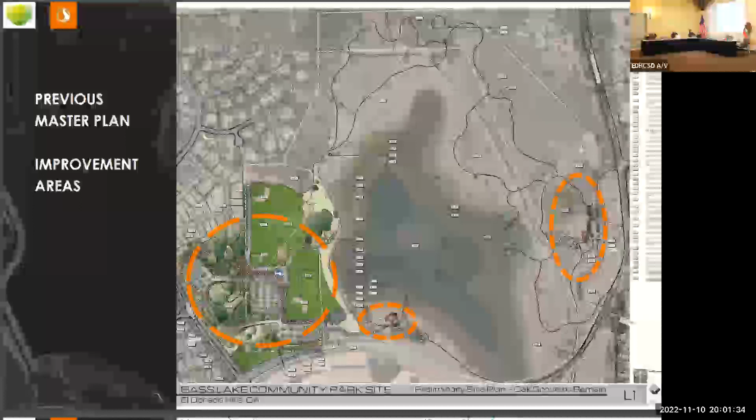Those circles there are the three areas we looked at for some improvements. This is the west side of the park that primarily has all the programming, and this is where we looked at as a team and really looked at ways to improve it.

And the biggest item that we came up with was the parks. In the previous master plan, there was an adventure area here, there was a sensory area over here, and then over by the ball field close to the parking lot, there was another playground. Just talking together as a team, we really wanted to consolidate all those play areas into one, so you can manage them, supervise your children, they're close to the restroom, you're not crossing streets, and it makes a safer environment. So what we did was we took this road here that went straight...

...and we did a parking analysis, and we bent it down and centered it up with the parking lot, which freed up this space here. Then we ended up rotating the field to a north-south orientation that freed up even more space. So this provided approximately over an acre of space where we can program the sensory garden, the adventure area, the all-inclusive play, and the picnic areas buffered from the parking lot. You have an entrance here where everything can be controlled and kept safe.

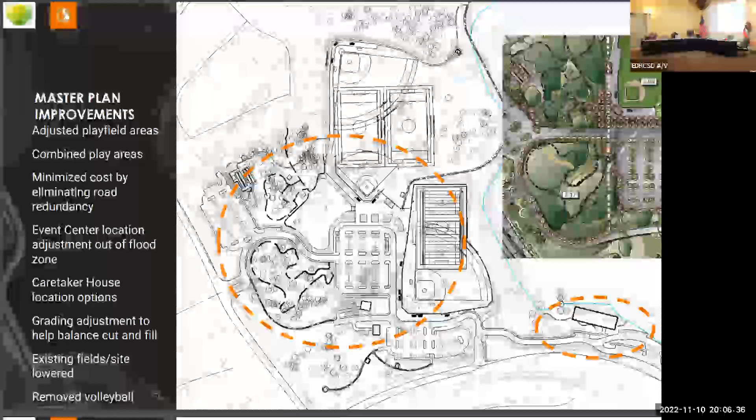On the east side, the original master plan had the nature center building kind of right off the parking lot. We wanted to make it more of an experience, a sense of place, a sense of arrival to the building. So we want to pull it off from the parking lot where you would walk to it, and couple it with the amphitheater. If you have an event or children, you can spill out, have indoor-outdoor connections, and make it more of a multi-purpose space.

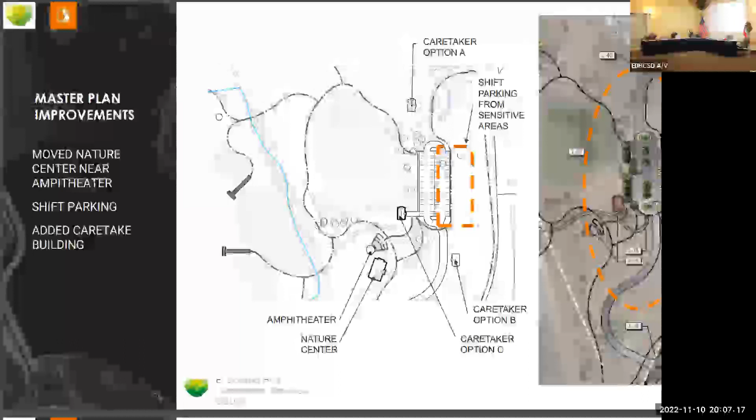We're also talking with staff about a possible caretaker building in the future, possibly a 2-bedroom, 1-bath structure that would help oversee the site. We discussed possible locations for that and did 3 options: one on the north side, one on the south, and one a little more by the pond. None of that's really been decided yet—it's just things we're studying.

We're also pushing back the parking lot a little bit, since there are some sensitive areas off to the side of the seasonal pond.

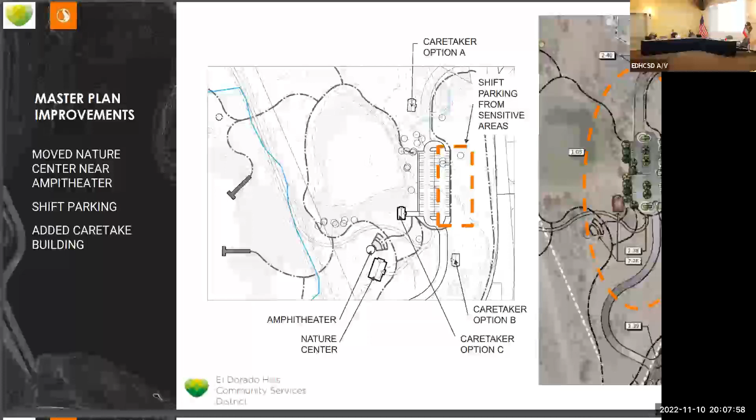Once we got the site plan set, we wanted to look at the grading, since there's a lot of topography out there and we needed to figure out how it would really all work. In the original master plan, the intent was to keep this one field, so we started there—if we kept the field and graded out the site, what would it look like? Essentially, since it's so tight, this area becomes one big super pad, one big flat area at about 1.5%.

So you don't have that much room to play with—you can't really adjust the grade. When we did the analysis to leave this field at existing grade as one big flat area, we were at 130,000 cubic yards of fill. That's a massive amount of fill—it'd be really expensive. So we looked at other alternatives and did some other concepts.

What if we lower this field? If we lower it and cut, that would generate fill we can use elsewhere. Right now we're looking at dropping this field about 5-6 feet to help offset some of the cut and fill. It probably won't balance totally, but it will significantly help.

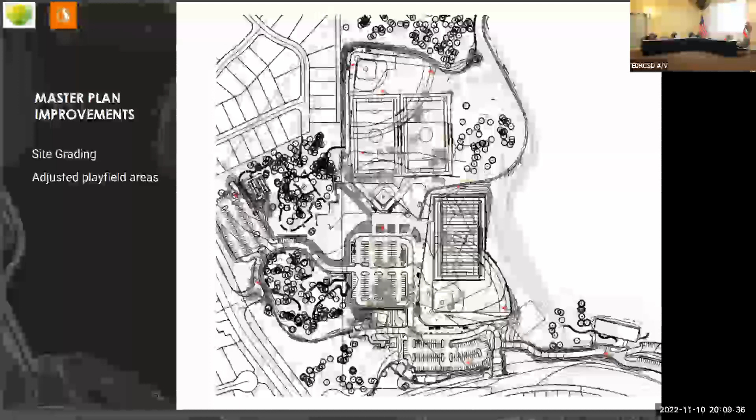Right now Geotech is out there doing test pits on the site to see where the rock is and how deep we can go. If we want to go 6-7 feet and hit rock at 2 feet, we may need to take another look, but we're aiming for the ideal situation to see what we come up with. You can see the slopes are mostly on the edges—we might need little walls, slopes on the edges. We want to minimize retaining walls since they're expensive, but grade it out as much as we can.

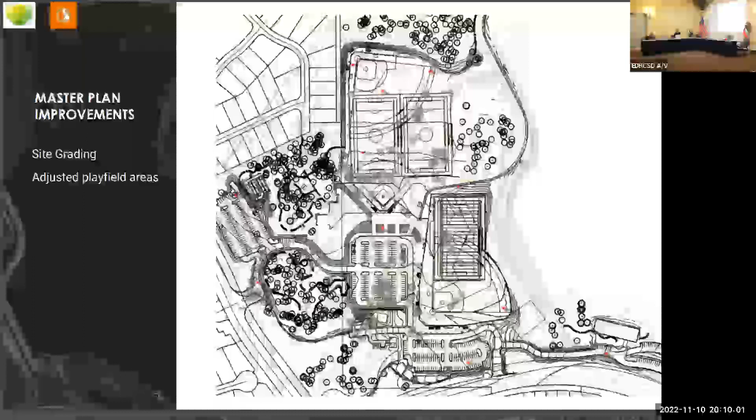Now for the architecture. We worked really closely with staff on the architecture and the programming of the buildings, what's really in them, how big, how they're going to be used, which is really important.

So we started off just looking at the region. We call it the regional craft. What's our inspiration in the region? You've got the oak trees and the great rock outcroppings, obviously the lake and the meadows and the natural environment.

We looked at the materials of the building, what it could be, the colors, finishes, transparency.

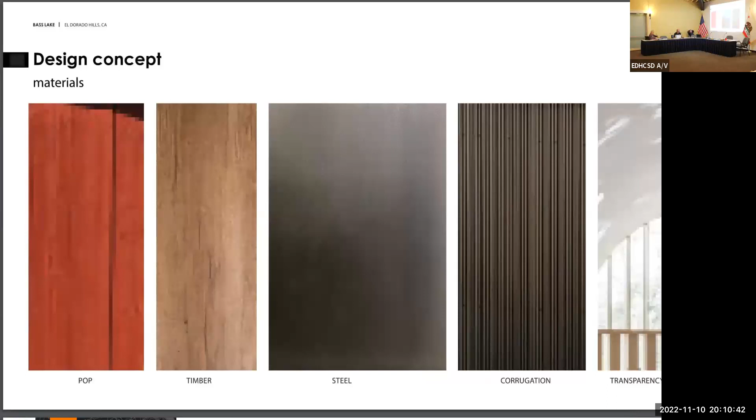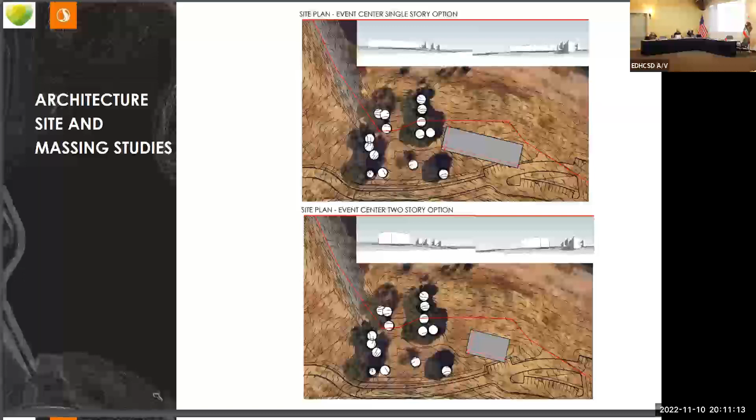Just talking with staff, we're kind of leaning towards the one-story building. It just blends into the scale of the trees, it's not overly dominant, and also it's going to be easier to construct. Your foundations are going to be smaller. You can have nice big trusses like this building here, open ceilings with trusses. You won't have to deal with an elevator, maintenance, or ADA access issues like in a two-story building.

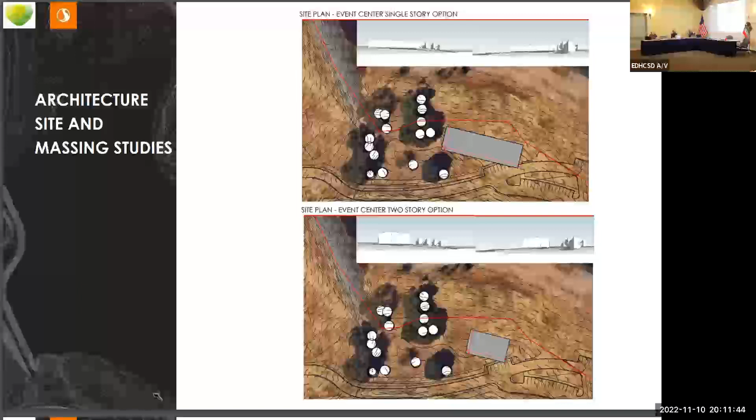Some of the program elements we came up with: for the event center, just in the master plan I think it was more of a placeholder, about 8,500 square feet. We went through analysis with staff and came up with about 13,000 square feet. That's composed of 2 ballrooms, 2 meeting rooms, classrooms, breakout rooms, a warming kitchen, restroom, storage, and a viewing deck. The ballrooms can be partitioned, so they could be one big one or broken up — it's really multi-purpose.

The nature center was originally envisioned at about 2,500 square feet. After we went through it, it's maybe like 5,200 square feet. That would include a reception area, 2 classrooms, a couple labs, a science center, conference room, warming kitchen, storage, restroom, and it'll be connected to the outdoor amphitheater.

And the caretaker house, we're looking at around 1,500 square feet for a 2-bedroom with a living room and bathroom facility.

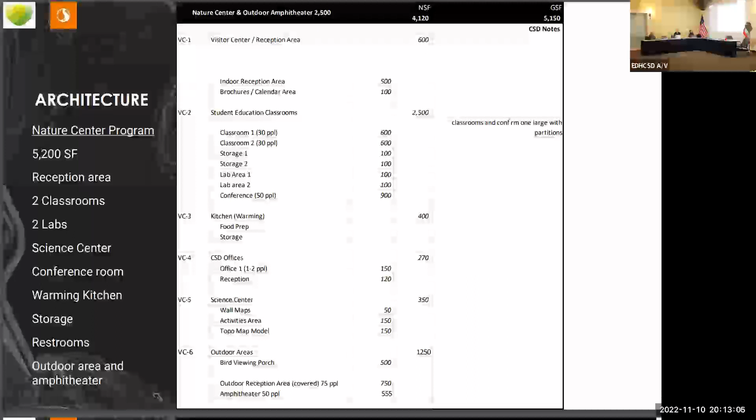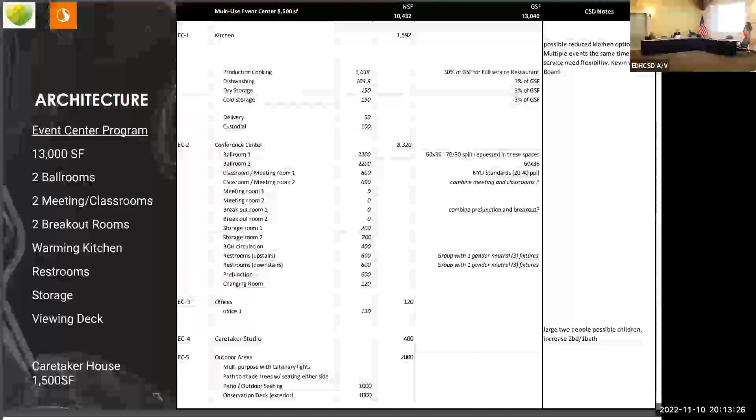This is just a little detail breakdown. I won't go into it in general, but it's in the presentation on how we came up with the square footage and what the assignments are to each of the spaces, and same with the event center — approximately how many square feet per each, and the grossing factors.

We spent a lot of time with staff going over precedent images — what's the character of the building, what's the style, what's it going to look like? These are just some inspirational images we'll pull from as we advance.

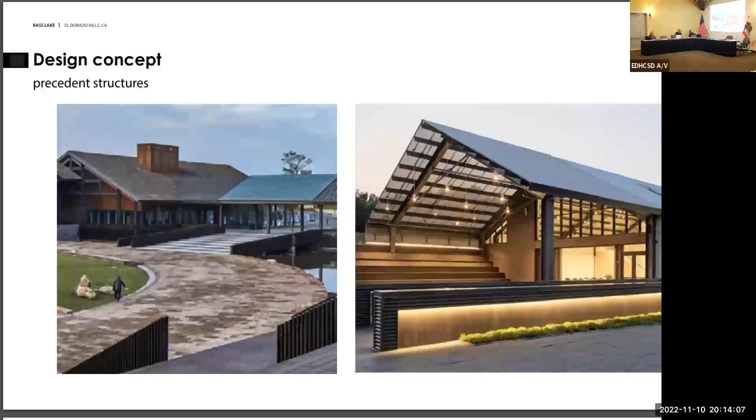The elevations — right now we're just in the conceptual phases, trying to understand where we're going, and then we'll take the feedback and start building the elevations of the buildings. A lot of feedback from staff was natural materials, something that would blend in, very simple roof lines, a lot of glass, transparency, overhangs.

This is what I was talking about with the one-story building — you can have big open air spaces, truss systems, big glass vaulted areas, or even at the ends you can have glass looking out to the lake, depending how you position it and lay it out.